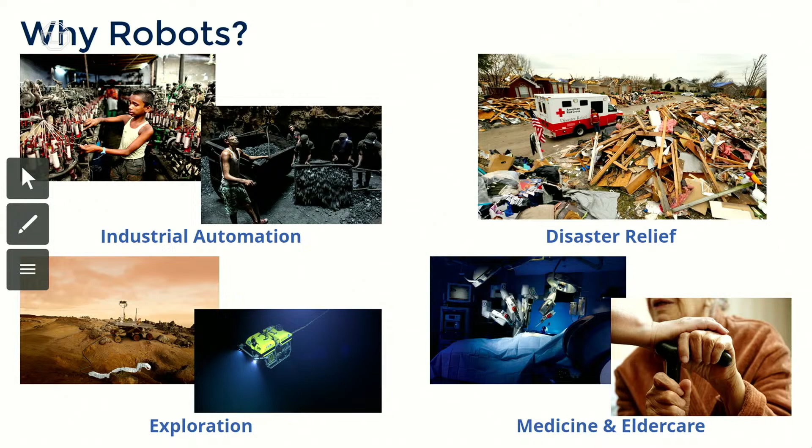And finally, medicine and elder care. As the population of westernized societies like ours grows older, we will need more and more people that can help us as we grow older as well. And hopefully having robotic assistants that are able to assist us in a personalized manner in our home will be a great way of reducing the burden on our healthcare systems, and also maybe to make our life a little bit better at the personal level.

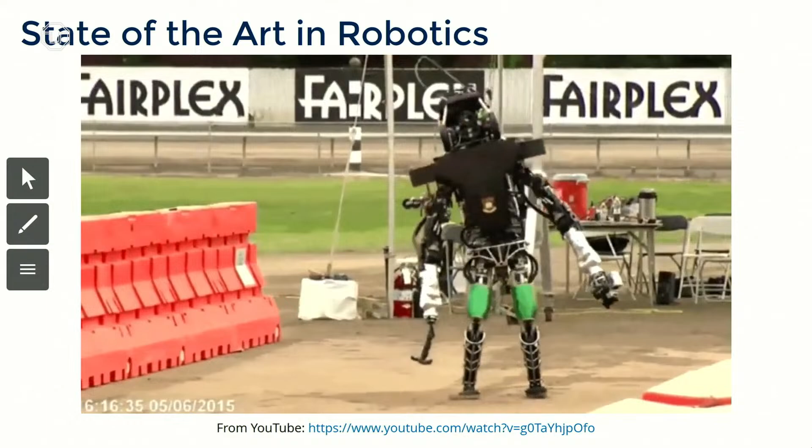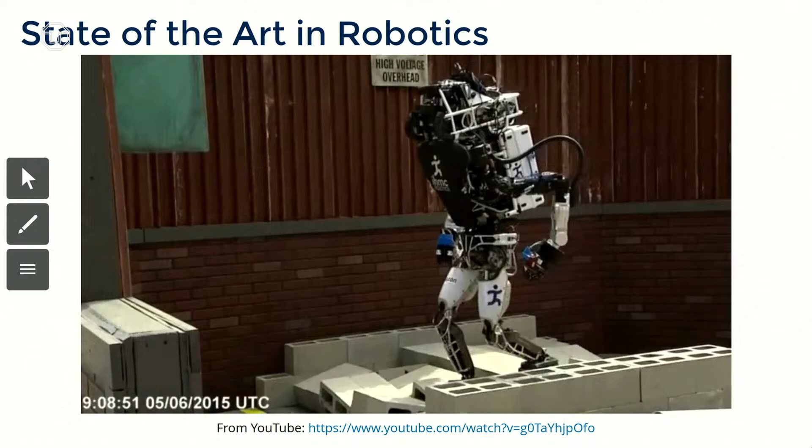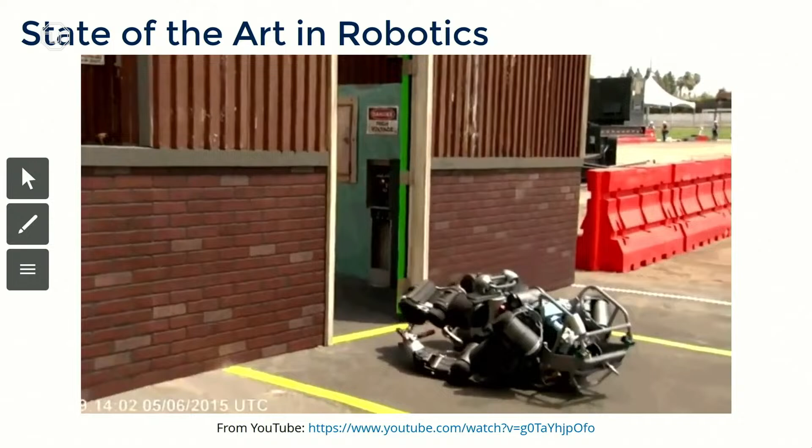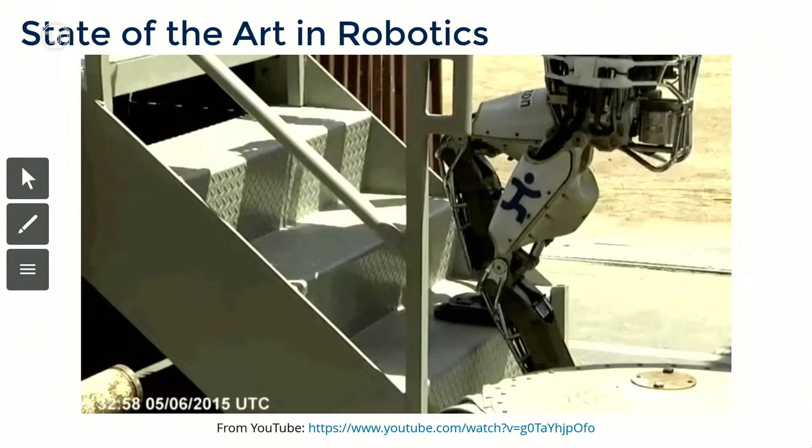However, if we look at the reality of robotics nowadays, it's pretty far from the science fiction movies that we see. These are videos taken from the DARPA Challenge in 2015. These were the best teams in the world, spending 4 years of their time, hundreds of millions of dollars, and teams of up to 100 people in order to program robots to navigate a relatively simple path that any human can walk through, opening doors, doing simple tasks, and the outcome, as you can see here, are failures that no human would ever make.

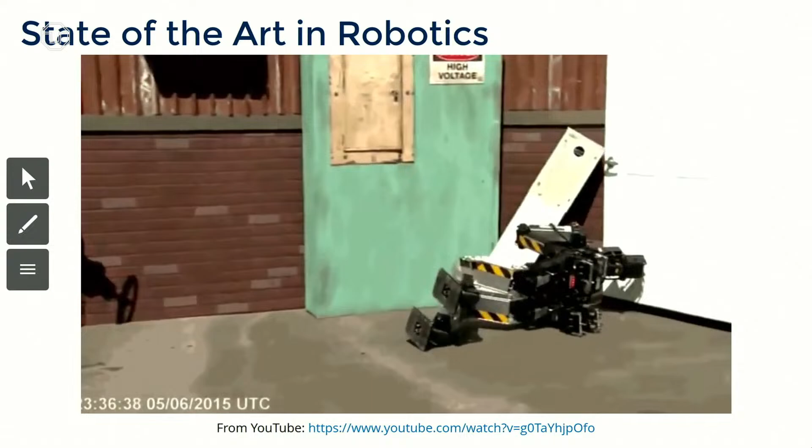My kids, who are up there, would never fail to open a door and fall backwards. And I'm very happy to report to the rector that if you close your door, you are safe from all robot overlords, at least at the moment.

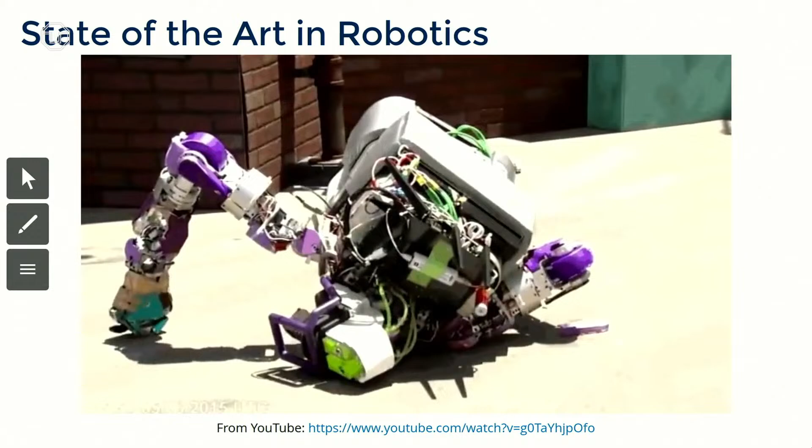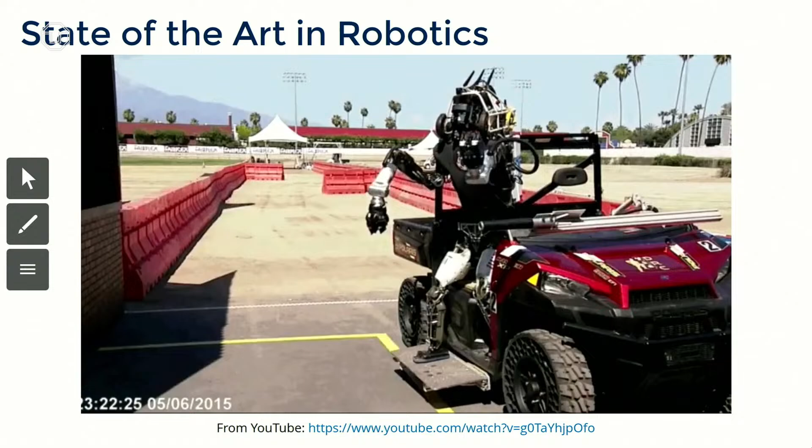So, why are the robots failing like this? What is the problem with the way that we currently design and program robots? Of course, there are many components that are missing. And fundamentally, the question that I'm interested in answering throughout my research and in our lab is: what are these components? What do we need before we are able to deploy robots in the real world in a way that is meaningful, in a way that is safe, and where we can truly interact with people and help them in their homes, in unstructured environments outside of the lab and in our everyday life?

And coming from the world of artificial intelligence, at least part of the answer to me is that we need to replace or complement the traditional algorithms that we use for controlling robots with artificial intelligence, in order to give them the capability of better adapting to the changing conditions of the world, to the uncertainty of the world, to the messiness of the world. And fundamentally, this is one of the two missions that I'm interested in developing in our lab, the LASR lab: making robots more useful in the real world through the use of artificial intelligence as a primary tool.

On the other side, there is also a very fine and subtle philosophical point, which is that as we develop better algorithms to make our robots more useful, we are also investigating the nature of intelligence itself. Especially in our current artificial intelligence community, many people believe that it's possible to have general purpose intelligence just by training from images or data sets that we can find online. However, if we look at the world around us, the only example of intelligence that we are aware of is embodied intelligence. It's humans, it's animals that have a body, and the body is very likely heavily shaping the way that we learn, the way that we sense the world, and even the algorithms that we use are constrained by the body and shape of our physical manifestation and the environment in which we interact.

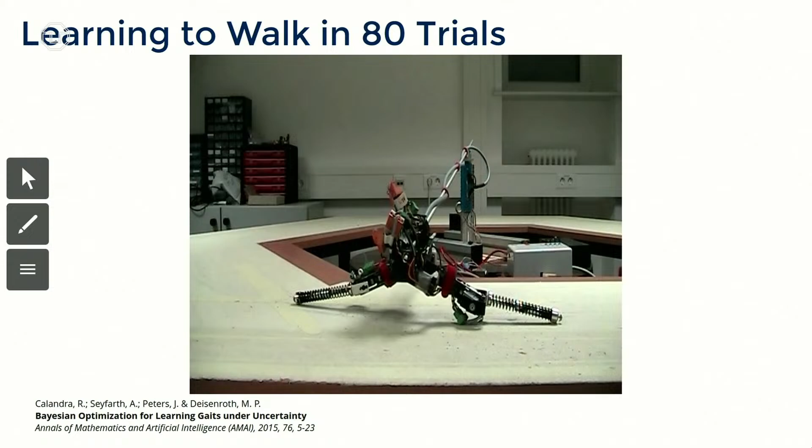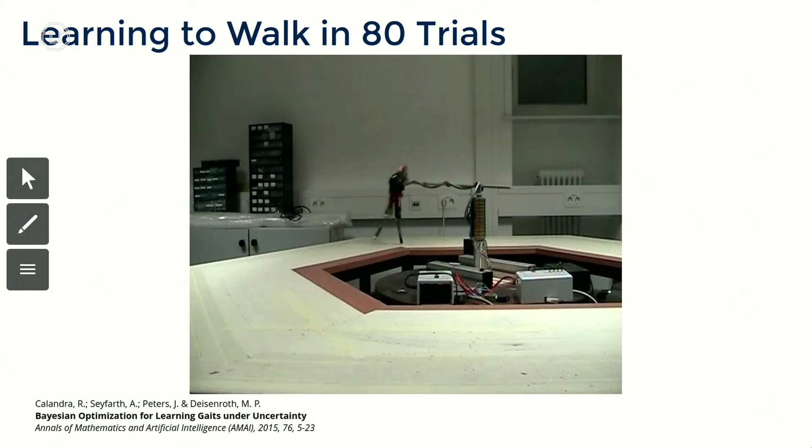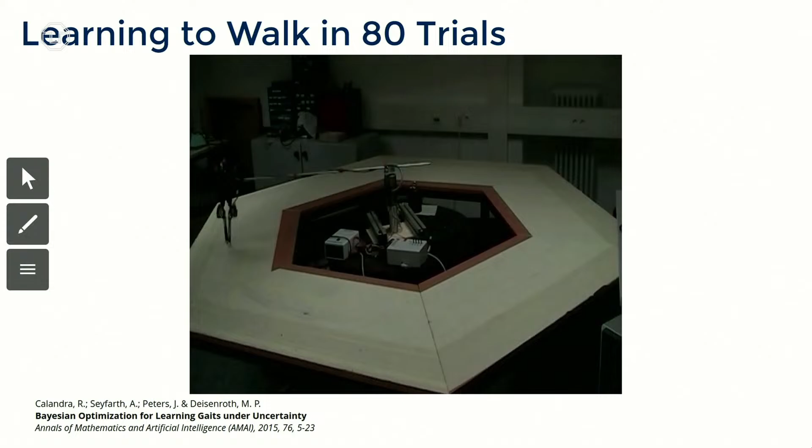And I will be starting from one of the first works that I did many years ago during my PhD, where we had a small bipedal robot, a quasi-passive dynamic walker with springs, extremely difficult to control. And the PhD before me spent 2 years in order to design a controller which was capable of walking. And my job was to instead create an algorithm that we deployed in the real world and was capable of learning how to walk in a day.

And the robot was, through trial and error, attempting to walk, and initially would fail, and over time it would get better and better until by the end of the day it was able to walk with the same performance of what the PhD student spent 2 years coding. And this was without any knowledge on my side about this particular robot or this particular structure of the biomechanical controller used to control the robot. It was everything entirely learned from data.

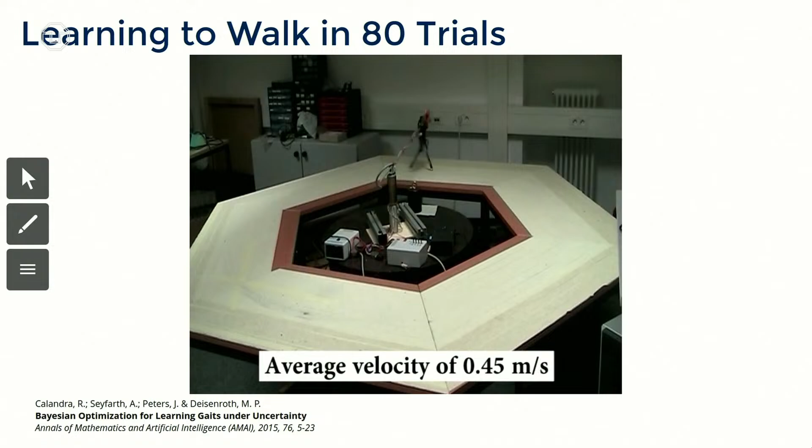This is great. The same type of algorithms, we also used them later to learn how to walk with simulated micro-robots that were capable of learning not only to walk as fast as possible, but also to make trade-offs between different objectives, such as the speed of the walking and how much energy they were using, so that in different opportunities you can decide what's the trade-off that you want to have.

If a bear is running after you, well, you probably don't care so much about energy. You just want to go fast. If you're taking a stroll in the park, on the other side, you don't care about speed. You're just enjoying your walk, and you can be more energy efficient and enjoy it more. And we were also able to discover new gaits that don't exist in nature, which was kind of a side project.

We also deployed this for the learning and optimization of hardware configurations of robots, so that we were able to discover different morphologies and their respective controllers that were able to perform better in different environments. For example, uphill or downhill.

And then we went to a biologist at Arizona State, and when he looked at these morphologies that our algorithms automatically discovered, he was like, oh yeah, these are the two morphologies that we find in insects. What were you expecting? This is the posture that insects take if you are on granular media, and this is the posture that insects take on harder surfaces.

Overall, we applied the algorithms that we developed to a fairly long number of problems. Some of them are robotics, but more generally, the algorithms that we develop are applicable to any decision-making problem that you can think of or that you can formulate in a mathematical way. And beyond learning to walk and flying and grasping with robots, we are able to control ferrofluid droplets, for example, to deliver drugs in a very precise way inside simulated human bodies through the use of ferrofluid droplets and magnetic fields to control them. We were able to optimize the design of micro-robots. We were capable of optimizing bioreactors to be more efficient, to be able to regenerate bones faster than what people would normally be able to design.

We were also, as part of a really cool project that we did a couple of years ago, able to speed up MRI machines, which is a major problem in medical applications, because taking an MRI at the moment takes 1 hour or so. And so the main bottleneck of whether you can take an MRI when you need it is: is there space and time in the machine? And we were able to show that we can speed up by about 4 times the time necessary to take a scan by adaptively optimizing the frequencies that the MRI machine is sampling on the patient. And finally, we used some of these algorithms for the real-world optimization of processes at Facebook on planetary scale.

Now, as I've mentioned before, I've not gone into details of what exact algorithms we are using, and we've developed a very large variety of them. But if you're interested, I'm super happy to talk about this offline if you have questions. However, I will now move on to another topic, which I think is very interesting, and in which we've been focusing quite a lot of effort over the last few years, which is touch sensing.

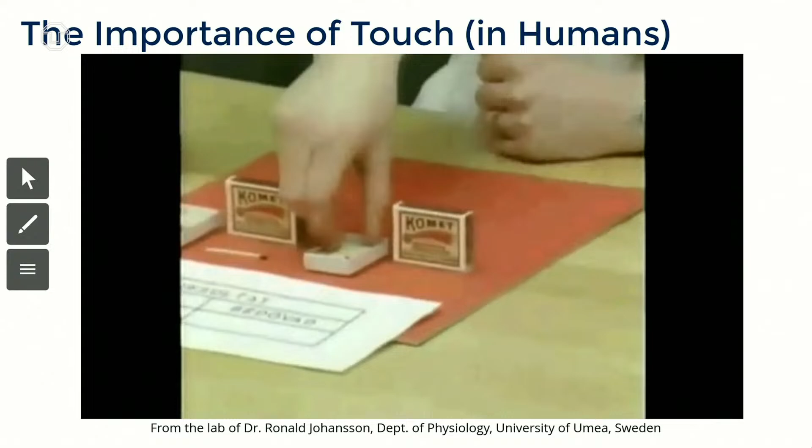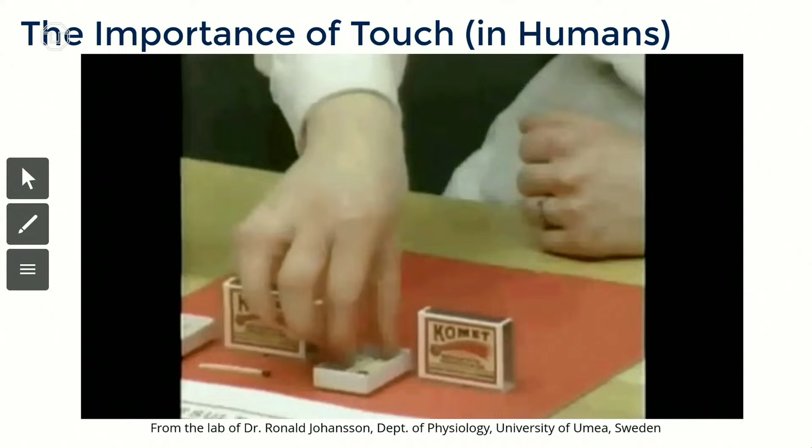And we have confirmations from experiment, for example, from Ronald Johansson, of the importance of touch. What Ronald Johansson did a few decades ago was that he asked people to perform very simple tasks, like lighting a match, and then he would anesthetize their sense of touch while keeping their motor control capabilities. And suddenly, the same task that you've done thousands of times throughout your life becomes extremely hard. It takes all your effort, all your mental activity, and it takes much longer than what you would do naturally if you were able to sense touch with your fingers.

And this is just a demonstration in the case of humans, but we also have demonstrations and proof by now that in the context of robots, as you can imagine, this is extremely useful. And the sense of touch is something that people have been investigating for many years in the scientific community. There are decades and decades of literature about touch, but the main problem that we have had until now is the fact that fundamentally

touch is an interdisciplinary scientific endeavor, which really requires people to come at this from many different points of view, from people that build hardware to neuroscientists and psychologists that can help guide how we make sense of touch. And so far in the community, there has been a huge problem of people working at different levels of this interdisciplinarity not being able to work together, exchange results and leverage other people's work.

And so something that we've been trying to do very hard over the last year is to ask ourselves how we can lower the entrance bar to the field of touch, how we can improve reproducibility and overall accelerate research by reusing existing components that anybody in the world can contribute to and somebody else will be able to reuse and build upon. And as you can imagine, the answer is in some ways very trivial, which is standardization. If we are able to standardize the field, if we are able to build tools that people are able to reuse, then everything is solved. But in practice, this turned out to be a very difficult endeavor.

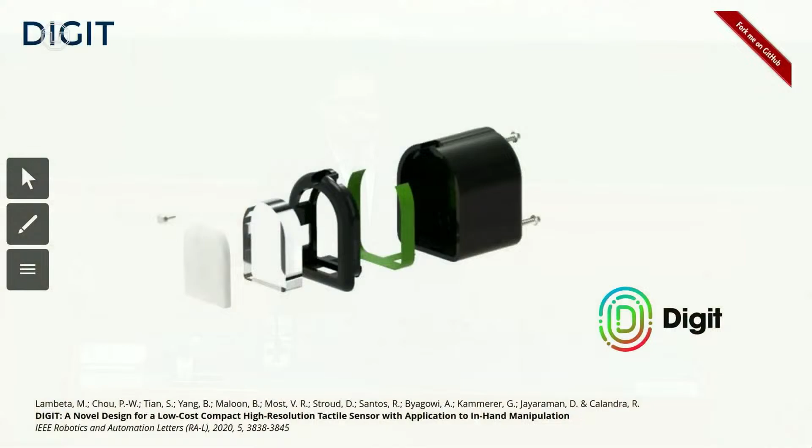This is a principle that has been proposed over the years independently by many different people and labs, starting already from the 60s. But more recently, Ted Adelson from MIT has been rediscovering or repopularizing this idea around 2010. And what we did in 2020 is that we designed and open sourced to the community the first low-cost, high-resolution, mass-manufacturable vision-based tactile sensor.

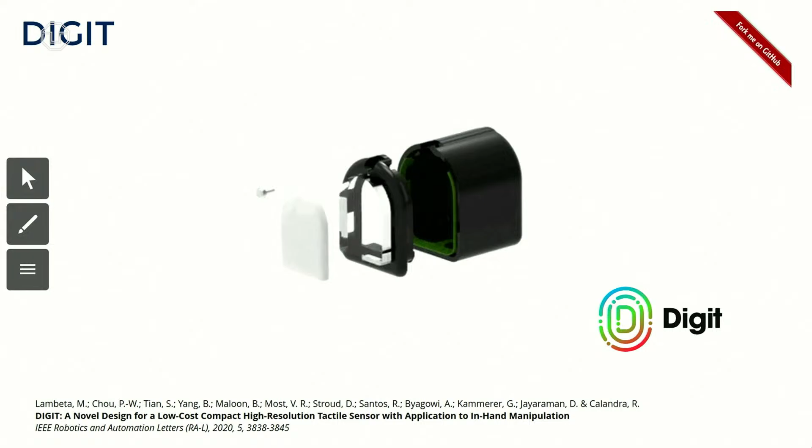This is a sensor that is extremely easy to use. It's extremely easy to manufacture. You can 3D print it at home. You can cast a piece of silicone. You can order a little bit of electronics online, it comes to your house, and you can put it together. This is by far not the best sensor that we can build, but this is the Model T of tactile sensors. This is a tactile sensor that everybody can use and build and have in their home.

And the type of readings that you get looks like this. For example, here is a piece of Velcro, and you can see how in the tactile sensor you are able to detect the geometry of each one of the individual teeth of the Velcro, down to a resolution of about 20 to 50 microns, which is in the same order of magnitude of what human skin can measure in terms of geometry.

And just to give a comparison with leading tactile sensors that were commercially available at the time, the BioTac, when we published this work, was the sensor that everybody would buy if you wanted to do tactile sensing. Both the BioTac and the DIGIT are small enough that you can mount them on a multi-finger hand for robotics, but the BioTac only provides you 19 taxels, while the DIGIT provides you over 300,000. This is 3 orders of magnitude more. And if you want to buy a BioTac, it is $15,000.

While if you are building your own Digit at home, this is going to cost you about 15. This is not an incremental change. This is a significant step change, both in terms of quality of the images and readings that you can have, and in terms of cost. And of course, Digit was open source, so anybody, including you, can go home, download all the schematics, and build one at home or build upon it.

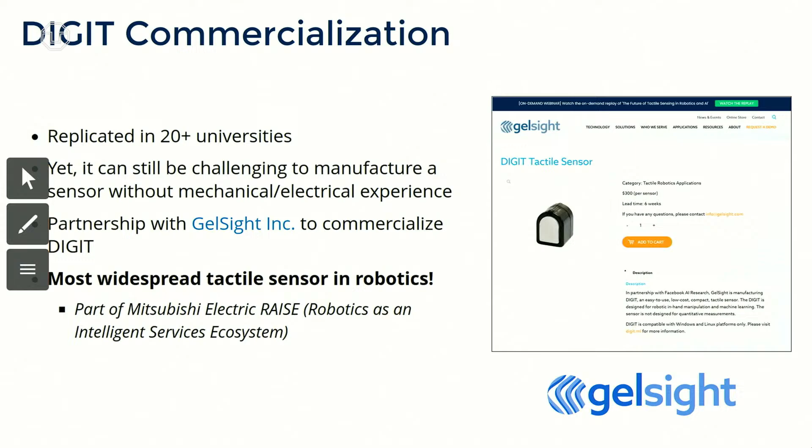And moreover, in 2021, we further enabled and tried to make it even easier for people. So we partnered with a startup in Boston, and we gave them the right to build this tactile sensor, which means that you can now go home and order one from their website, and after a few days it will arrive directly at your step in front of your door without having to know anything about silicone casting, or 3D printing, if this is not what you are interested in.

And by now, Digit is the most widespread tactile sensor in the robotic community. And recently also, Mitsubishi made it officially part of its robotic ecosystem. So we are hoping to have more and more real industries evaluating and applying tactile sensors into real-world applications. And as I mentioned, this is by far not the best tactile sensor that we can build. And over the years, we also built other tactile sensors with different properties. And I want you to keep in mind, again, this was a sensor meant to democratize touch.

Instead, another interesting sensor that we developed was OmniTact, which was an omnidirectional sensor of 3 centimeters in diameter, which was using 5 cameras to be able to sense omnidirectionally in the same way that a human thumb can. And recently, we extended our Digit family to have also an omnidirectional sensor with a diameter of 25 millimeters, which is functionally equivalent and better in many cases than a human thumb in terms of perception of the world.

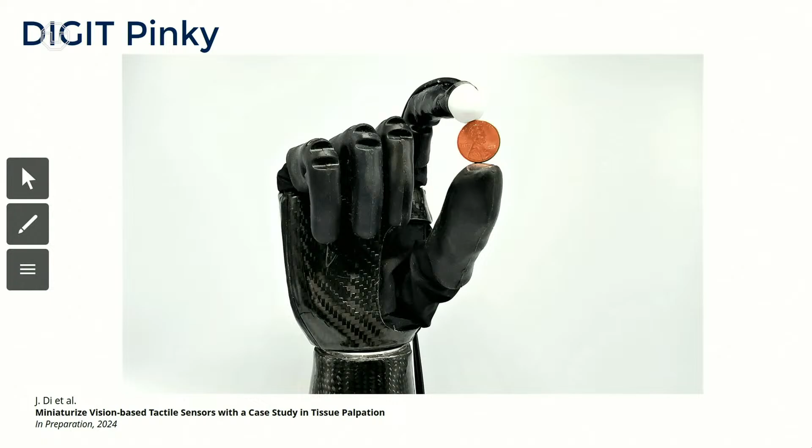And we are now in the process of publishing also a new sensor, the 3rd generation of Digit, which is a sensor omnidirectional, but only 15 millimeters in diameter. And in fact, this is so small that we can now mount it on prosthesis. And we currently have a trial in collaboration with Stanford to use it for medical applications to be able to detect cancer and anomalies in prostates, because this is small enough that you can actually insert it through Da Vinci and other robotics applications inside the human body.

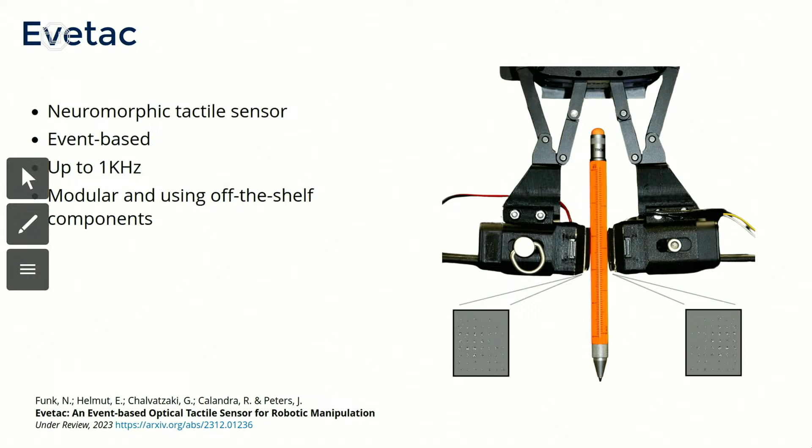On the other side, we've also focused on trying to make tactile sensors more similar to the way that humans are able to sense the world through the use of neuromorphic computing, capable of sensing up to 1 kilohertz, higher and higher frequency, while at the same time reducing the bandwidth necessary to transfer and process all of this data. In parallel to the hardware, we've also been developing simulators.

Simulators are very important in science because they allow you to test hypotheses without needing access to the physical world. And one of our contributions was the simulator Tacto, which was designed to be extremely fast. It can simulate vision-based tactile sensors up to hundreds of hertz. And from a perceptual point of view, it can fairly accurately simulate what a real sensor would be outputting if you were to touch and interact with an object.

Now, in the moment when we have hardware that senses, and we have a simulator that we can use to simulate this hardware, what's really important is the processing. How do we make sense of these raw images, and how do we extract the information that we need in order to be able to control or make decisions upstream? And the problem here is that fundamentally there is extremely limited literature on how to make sense of touch as a sensing modality, partially because nobody had such extensive access to hardware before.

And so one of our primary goals at the moment is to really bootstrap and create this new science of touch processing dedicated to trying to make sense of touch through the use of artificial intelligence. And this, of course, entails a lot of new questions that have never been asked before, including what are good features for touch? What are the right computational models that we need to use in order to leverage the intrinsic structure and biases that touch has as a sensing modality? What are the equivalent of convolutional neural networks for touch?

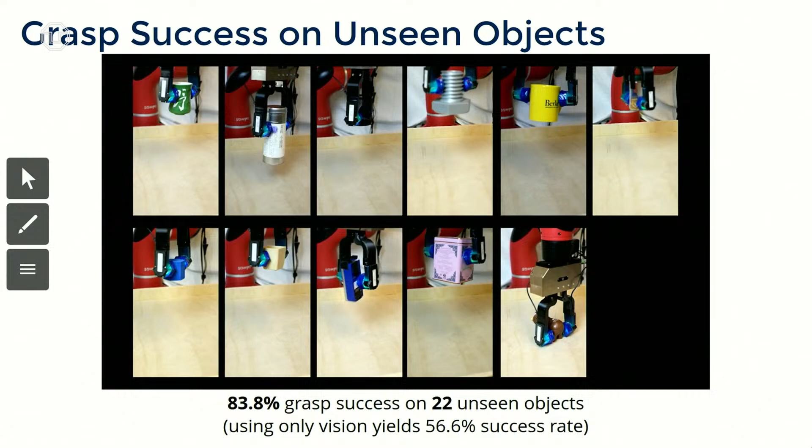And the result is a system that is capable of successfully grasping objects that it has never seen before with an accuracy of up to 83%, which is a significant improvement compared to models that only use vision, which is how current industrial robotics is tackling the problem. And some of these objects are deformable objects. Some of these objects have a wide variety of shapes and weight and frictions and materials and whatnot.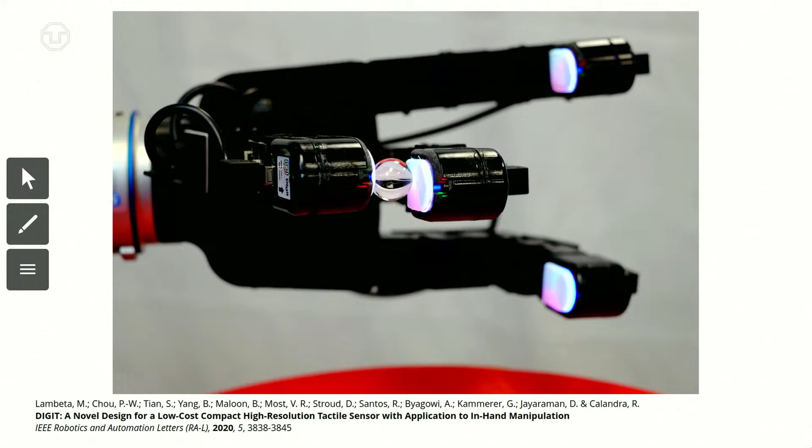We also worked on manipulating glass marbles, which is a surprisingly hard task if you are a robot, because if you apply too much force, you are going to shoot the marble out from your fingers. If you apply too little force, you are going to drop the marble. So being able to really manipulate small objects within your fingers to the place that you desire while keeping the right amount of force is very hard. And this is something that we did quite successfully.

Very recently, we also developed a system capable of rotating objects that it has never seen before. This is using tactile sensors and vision, and is capable of generalizing to objects of any shape. And we had a demonstration of this system at NeurIPS, this machine learning conference, where it also won the best demo award of the workshop on robot learning.

And finally, super recent work done in collaboration with collaborators at Meta and at CMU leverages the capabilities of rotating objects to also be able to create at the same time high-resolution 3D models of this object, and to be able to identify where in this object we are currently touching with our fingers, which is a precursor which we think is going to be very important to be able to do even more complex types of manipulation and even more complex types of grasping.

And finally, touch could be used for teleoperation, which is a topic that is, of course, very dear also to CeTI, where we can use haptic devices, we can use haptic gloves in order to be able to sense and transfer from robots to humans and vice versa.

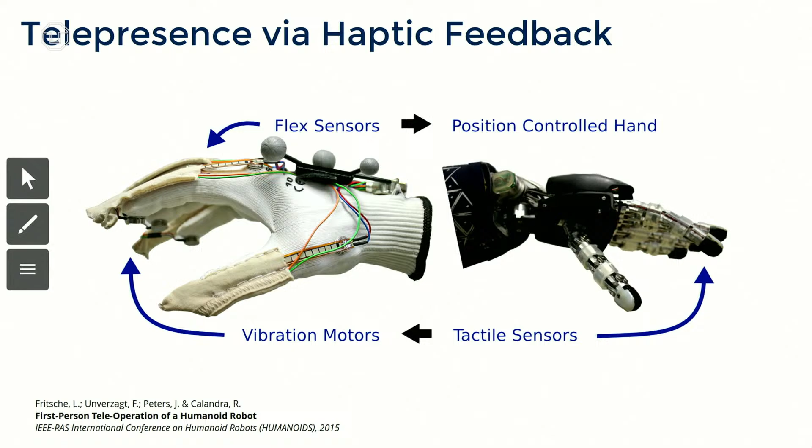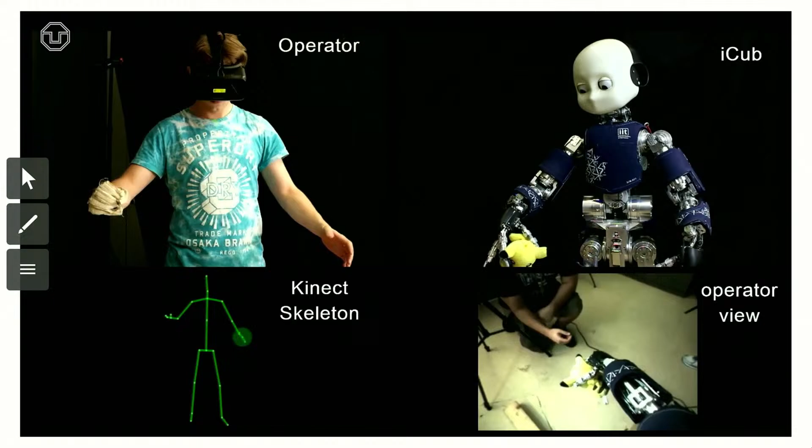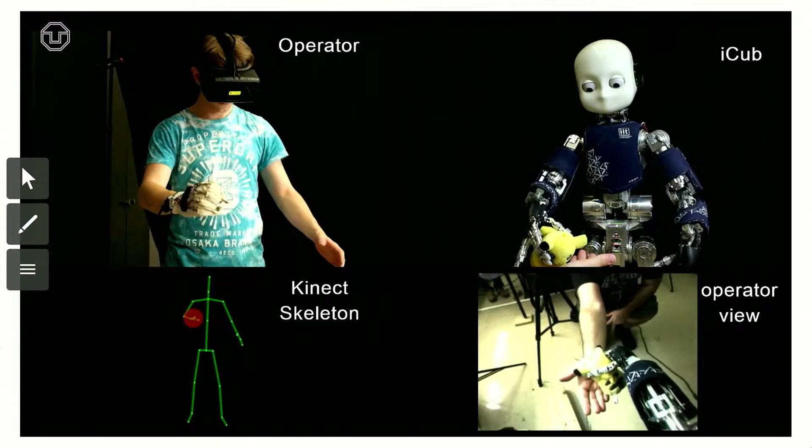And already several years ago, we had at the time one of the very first demonstrations of such a system, which was integrated onto a humanoid robot, the iCub, and we were able to teleoperate this very complex system through the use of an Oculus, it was not even called Quest at the time, but an Oculus Rift, where you can see through the eyes of the robot, a Kinect that can track your skeleton and map the robot position to the same joint configuration, and a haptic glove that can basically control the fingers of the robot and provide tactile feedback back to the human, so that you can feel very primitive sensation

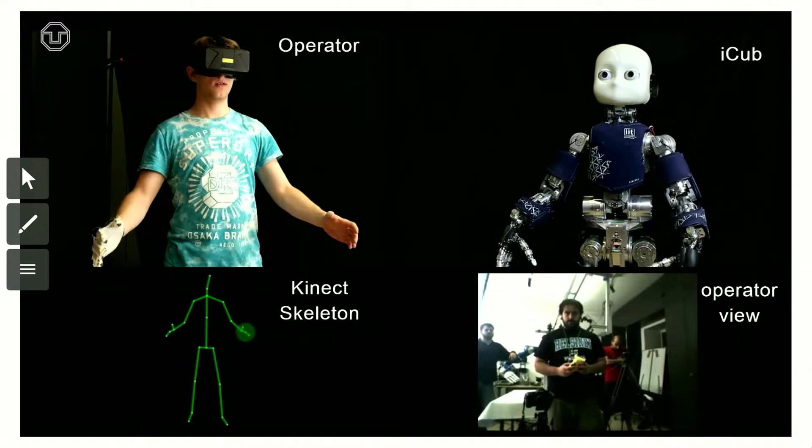of what you're touching. And of course, this is a precursor also to be able to collect data from humans in such a way that we can then train robots to repeat the same task and generalize the same task without the need to have an operator there 24/7, so that we can demonstrate a task and then just have the robot keep doing it.

So to conclude, I would like to invite you all, whenever you have time or whenever you want, to the robot lab that we have in the computer science department in APB. It's finally coming all together thanks to the efforts also of Ken, who is sitting up there. And we now have finally a bimanual manipulation system where we can start to replicate and improve some of these experiments and work, provided with also tactile sensors, of course.

And we will very soon get the delivery of the first humanoid robots that we will have in the campus in computer science, with the hope of really being able to have these humanoid robots interact in real-world scenarios in the houses of people and walk around the city so that we can really get information and experience with deploying such systems in the real world.

And by the way, these are AI-generated images. They're amazing. I love it.